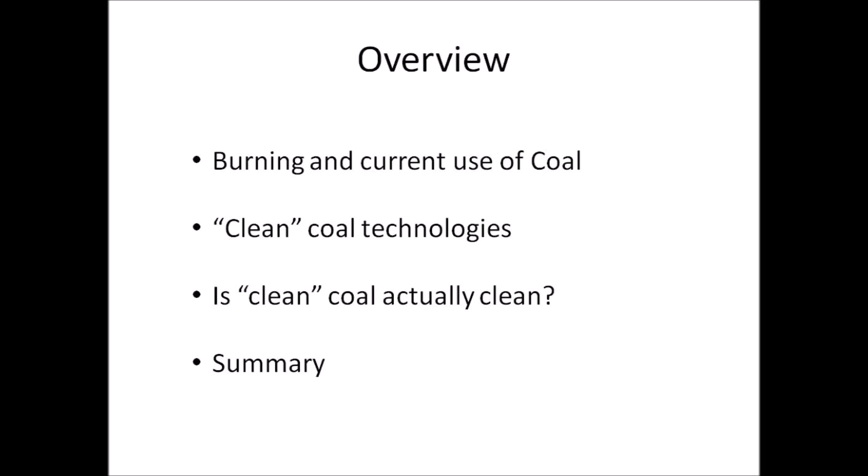Coal is classified into four main types and ranked accordingly: lignite, subbituminous, bituminous, and anthracite. The ranking depends on the types and amount of carbon the coal contains and on the amount of heat energy it can produce. Lignite or brown coal contains 25% to 35% carbon, around 70% when dry. Subbituminous contains 35% to 45% carbon. Bituminous contains 45% to 86% carbon, and anthracite or black coal contains 86% to 98% carbon.

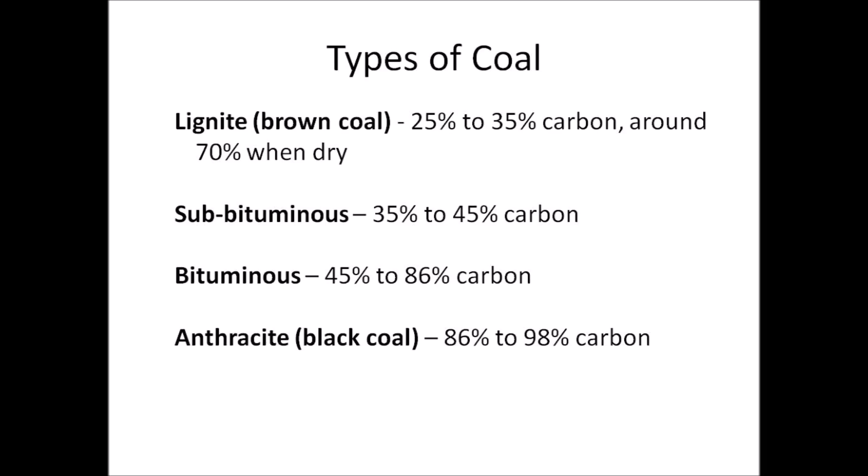In this slide, we have some specimens of coal. On the upper left corner, we have lignite, often referred to as brown coal. It is a soft, brown, combustible sedimentary rock formed from naturally compressed peat. It is considered the lowest rank of coal due to its relatively low heat content.

Next, in the upper right corner, we have subbituminous coal. It is a type of lower grade coal. Its properties are between those of lignite, the lowest grade of coal, and bituminous coal, the second highest grade. Subbituminous coal is primarily used as a fuel for steam electric power generation.

On the lower left corner, we have bituminous coal. It is a relatively soft coal containing a tar-like substance called bitumen or asphalt. It is of higher quality than lignite and subbituminous coal, but of poorer quality than anthracite.

And lastly, anthracite, also known as hard coal or black coal. It is a hard, compact variety of coal that has a submetallic luster. It has the highest carbon content, the fewest impurities, and the highest energy density of all types of coal, and is the highest ranking of all coals.

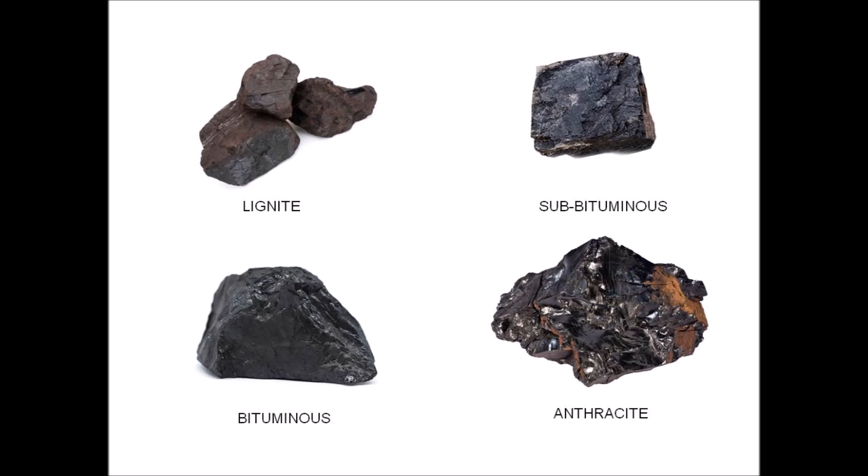Coal and electricity: coal-fired plants produce electricity by burning coal in a boiler to produce steam. The steam, produced under tremendous pressure, flows into a turbine, which spins a generator to create electricity. The steam is then cooled, condensed back into water, and returned to the boiler to start the process over.

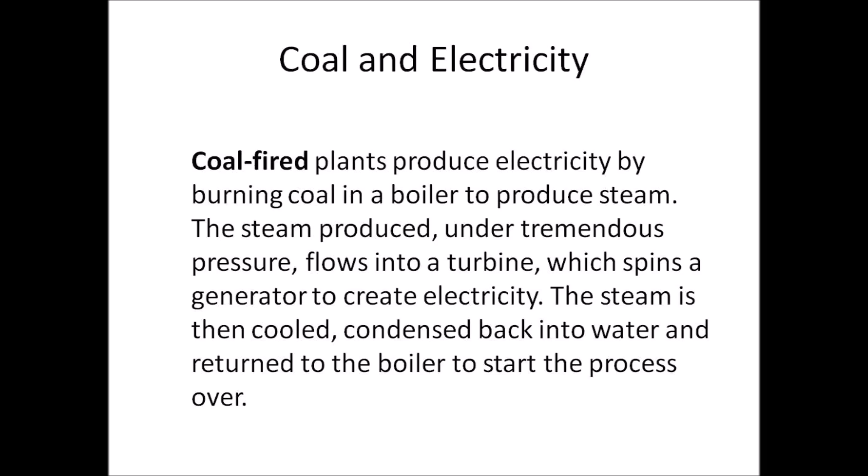In 2002, fossil fuels released 23 billion tons of carbon dioxide into the atmosphere. Of that, 41% was from coal. Burning 1 ton of black coal yields 4 tons of carbon dioxide, with other coals averaging 2 tons. Anthracite releases 67% more carbon dioxide than methane, and brown coal releases 130% more carbon dioxide emissions than methane. Coal also contains trace amounts of sulfur and nitrogen that, when burned, can cause environmental issues.

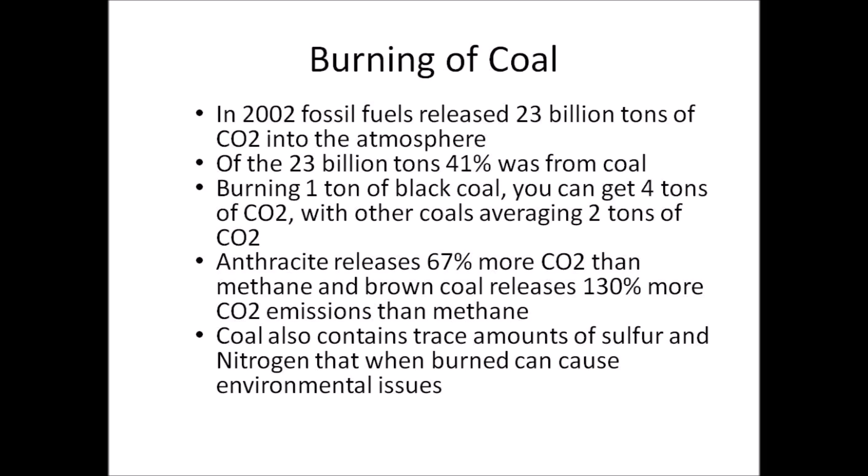Why is coal still used? It is the cheapest for power stations relative to the amount of heat it generates when burned, and it's also by far cheaper than nuclear, natural gas, and oil. Although alternatives like hydro are usually slightly cheaper, problems with hydro include no new facilities due to public outcry when river valleys are dammed, and peak demand problems, such as rivers running dry in the dead of summer when peak air conditioning is needed.

Why is coal still used? It is said to be the cheapest for power stations relative to the amount of heat it generates when burnt. Here are the cheapest options. The graph shows that from 1999 to 2007, coal still remains the cheapest amongst all the options.

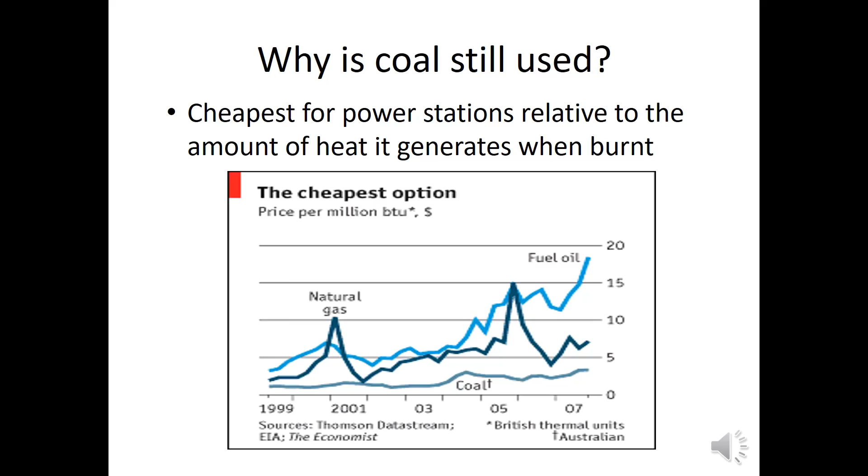So how does a coal power plant work? Coal-fired plants produce electricity by burning coal in a boiler to produce steam. The steam, produced under tremendous pressure, flows into a turbine, which spins a generator to create electricity. The steam is then cooled, condensed back into water, and returned to the boiler to start the process over.

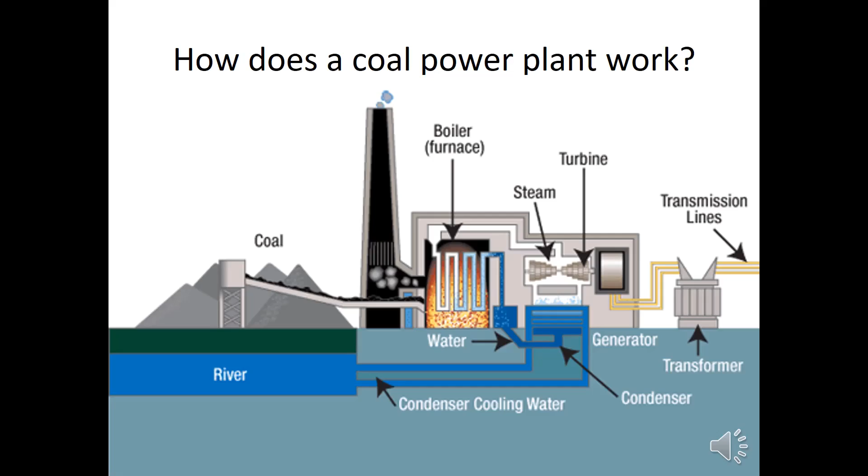So what is clean coal? It is actually a vague term that does not describe any one process. It can include the removal of nitrogen and sulfur that creates acid rain, or the storage of carbon dioxide. The term clean coal is abused.

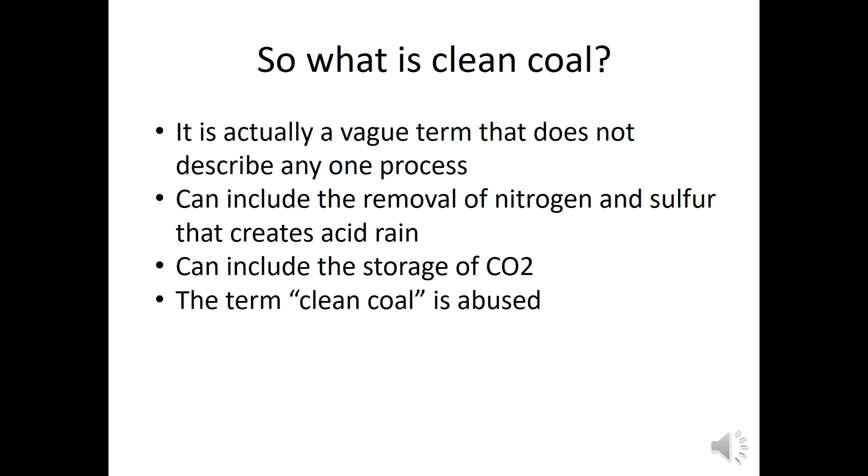Clean coal technologies include coal washing, wet scrubbers, low nitrogen oxide burners, electrostatic precipitators, gasification, carbon capture storage or CCS, fuel cells, and magnetohydrodynamics. These will be tackled in the next slides.

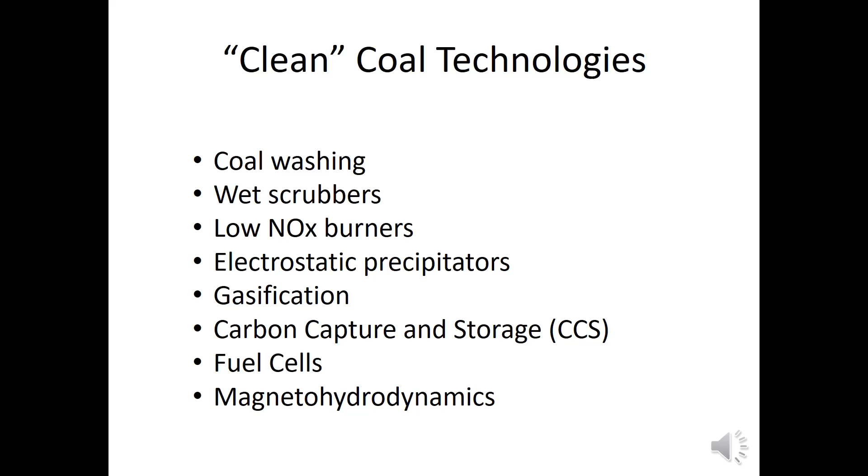Coal washing: grinding coal into pieces and passing it through gravity filtration. One technique involves putting coal into a barrel with a liquid of a specific density where the coal floats and the impurity sinks. Coal cleaning by washing has been standard practice in developed countries for some time. It reduces emission of ash and sulfur dioxide when the coal is burned.

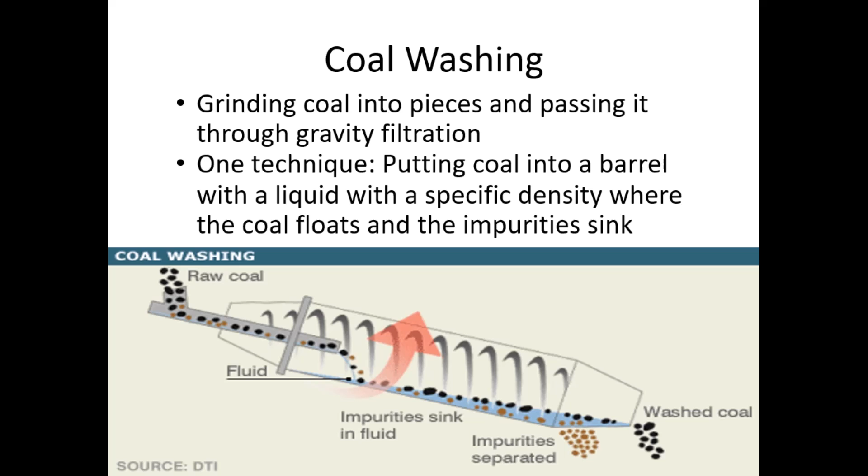Wet scrubbers can remove particulate matter by capturing them in liquid droplets. The droplets are then collected, with the liquid dissolving or absorbing the pollutant gases. A scrubber works by spraying a wet slurry of limestone into a larger chamber where the calcium in the limestone reacts with the sulfur oxide in the flue gas. Some scrubbers may use other chemicals such as lime or magnesium oxide to react with the sulfur oxide in the flue gas. Disadvantages of wet scrubbers include corrosion, the need for entrainment separation or mist removal to obtain high efficiency, and the need for treatment or reuse of spent liquid. It's also 99% effective.

The gypsum is collected and used for construction too.

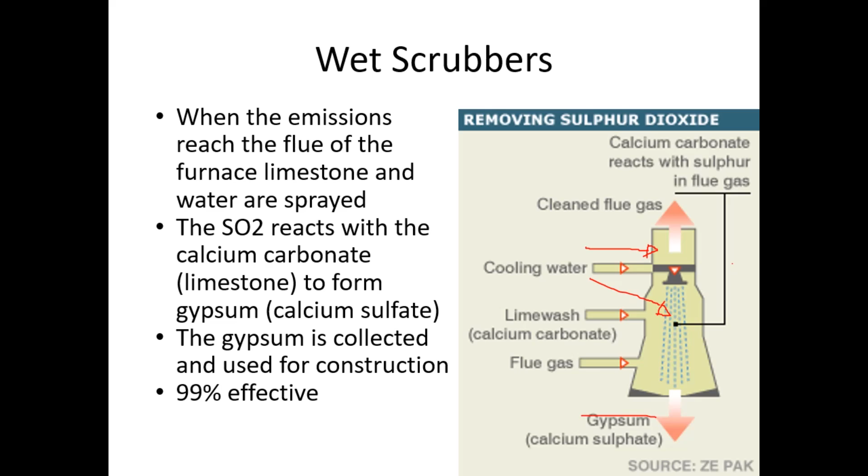Nitrogen oxide: stages in using nitrogen oxide in clean coal technology. First stage, combustion occurs in an oxygen deficient zone where nitrogen oxide is usually formed. Second stage, hydrocarbons are formed which react with the already formed nitrogen oxide. Third stage, internal air staging completes the combustion but may result in additional nitrogen oxide formation, which can be minimized by completing the combustion in an air-lean environment.

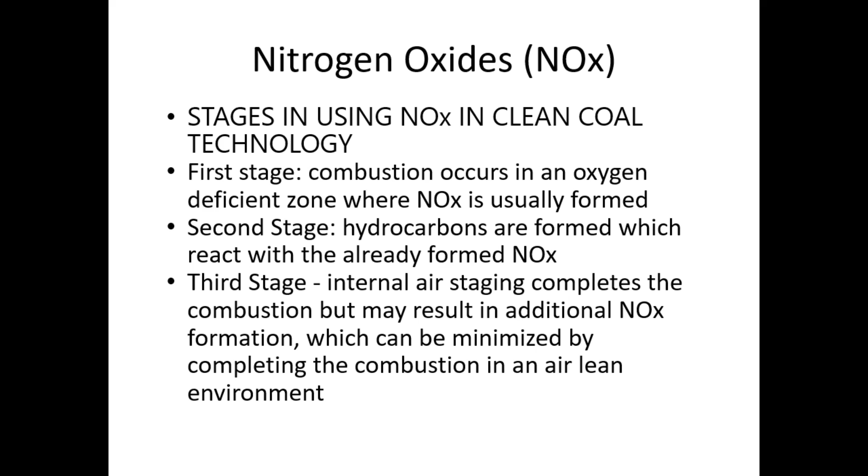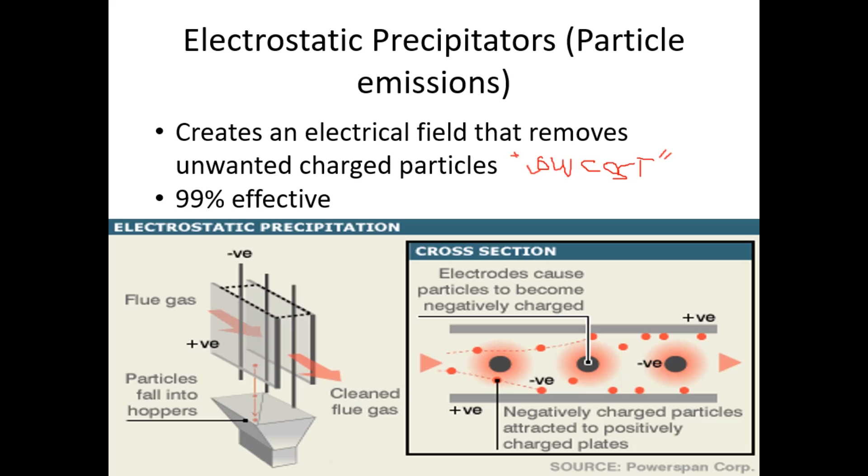Electrostatic precipitators create an electrical field that removes unwanted charged particles. At the cross-section, electrodes cause particles to become negatively charged, which are then attracted to a positively charged plate. The flue gas passes through the cross-section, the particles fall into the hopper, and the flue gas has been cleaned.

Gasification is a type of thermochemical conversion process favored by some because it is very flexible and has high levels of efficiency. It uses heat to convert biomass or fossil fuel-based materials into intermediates like hydrogen and carbon monoxide rich gas, called synthetic gas, or syngas.

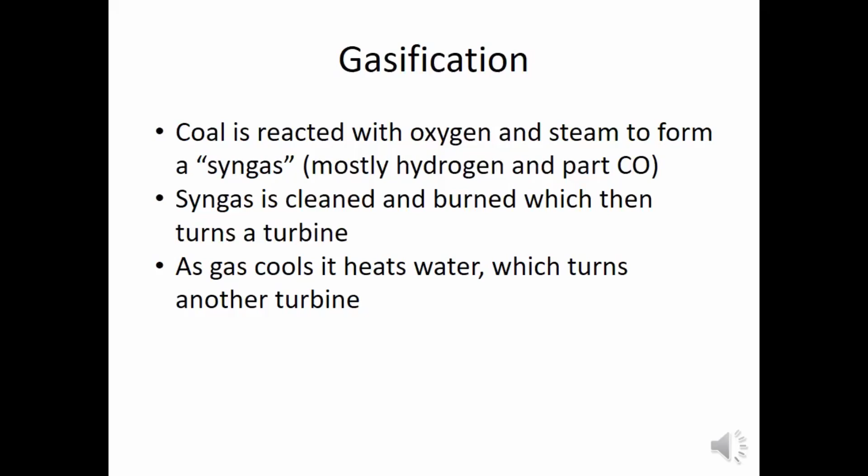Syngas is cleaned and burned, which then turns a turbine. As the gas is being cooled, it also heats water, which turns another turbine. Gasification is known for its advantage over combustion in terms of emission control.

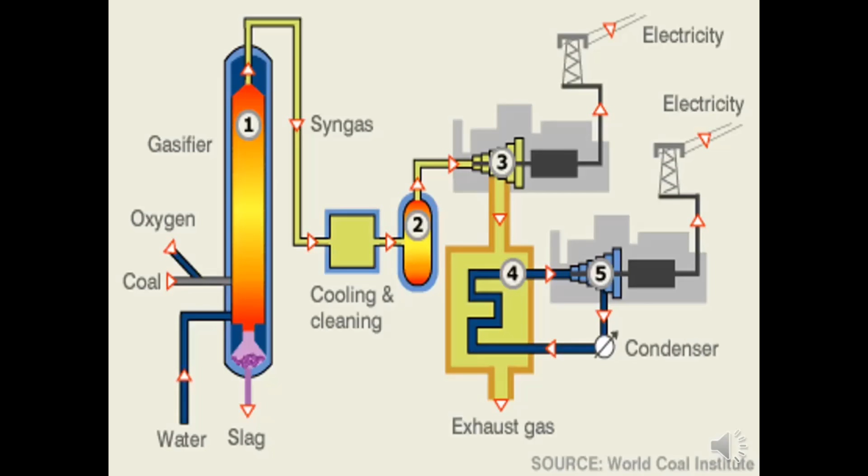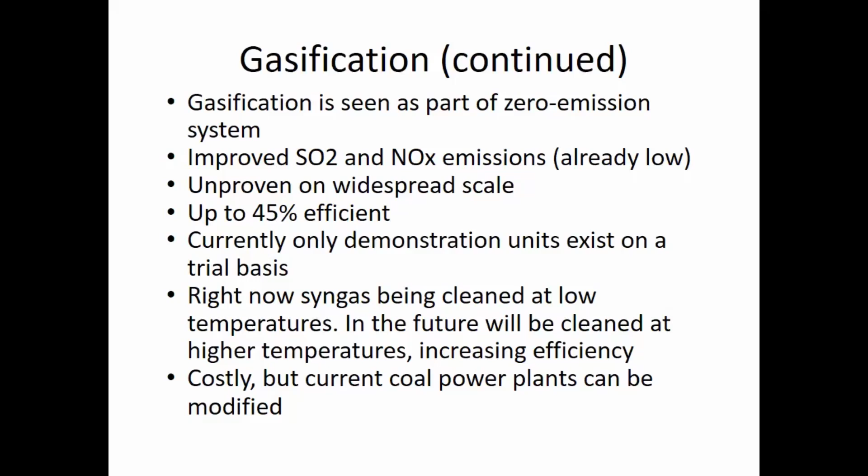Right now, it is expected that syngas is cleaned at low temperatures. In the future, it will be cleaned at higher temperatures, increasing efficiency. The gasification power plant is also very costly, but current coal power plants can be modified to increase efficiency, reduce production cost, and improve durability.

Carbon capture and storage is the capturing and storing of carbon dioxide underground. This process is what we term geosequestration. It can capture up to 90% of the carbon dioxide released by the process of burning fossil fuel.

The figure shows the options for carbon capture and storage. First, carbon dioxide is pumped into used coal fields and displaces methane, which can be used as a fuel. Second, carbon dioxide can be pumped into and stored safely in saline aquifers. Third, carbon dioxide is pumped into oil fields, which helps maintain pressure, making extraction easier.

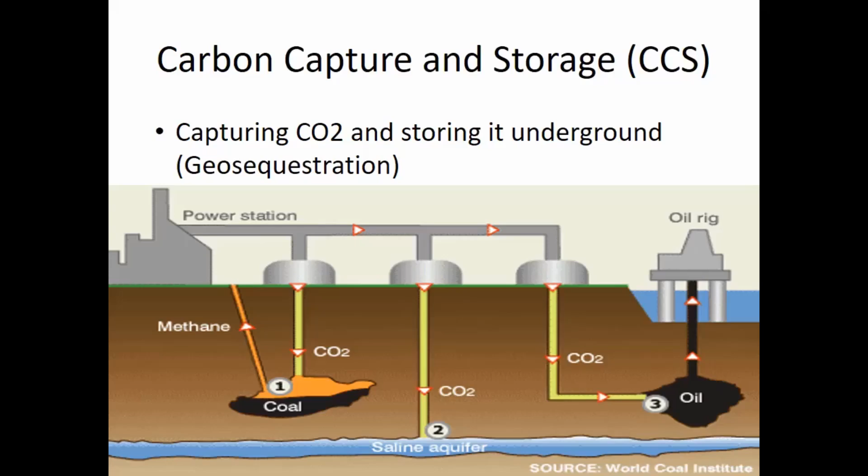The carbon dioxide is stored in carefully selected geological rock formations typically located several kilometers below the Earth's surface, so it is transported by pipelines or by ships. There are only so many places that are good for mass storage, and this transportation could also become costly.

At every point in the CCS chain, from production to storage, industry has at its disposal a number of process technologies that are well understood and have excellent health and safety records. The commercial deployment of CCS will involve widespread adoption of these techniques, combined with robust monitoring and government regulation.

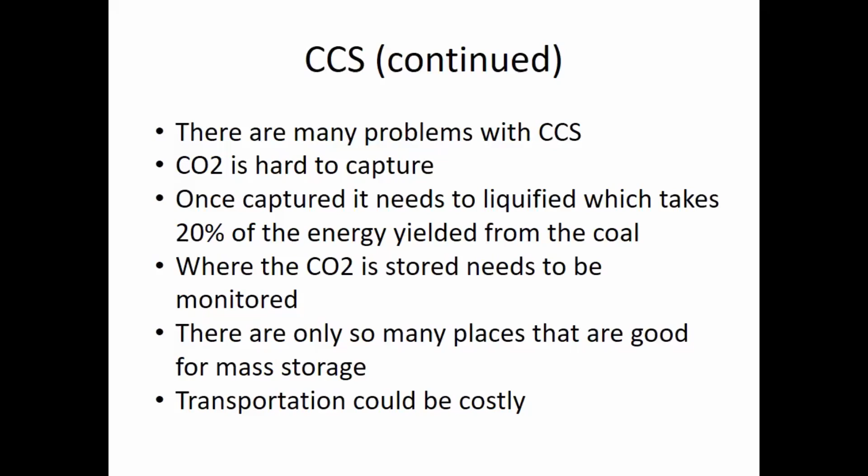Fuel cells allow hydrogen from coal to react with oxygen to produce electricity electrochemically. Specifically, hydrogen is produced by first reacting coal with oxygen and steam under high pressures and temperatures to form synthesis gas, a mixture consisting primarily of carbon monoxide and hydrogen, and it is costly.

This picture shows how a fuel cell works. First, hydrogen reacts with a catalyst when it reaches the anode. Second, this makes positively charged particles that go through the electrolyte, and electrons that travel along a circuit make an electrical current. Lastly, when the particles and electron reach the cathode, they react with oxygen to form water and usable heat.

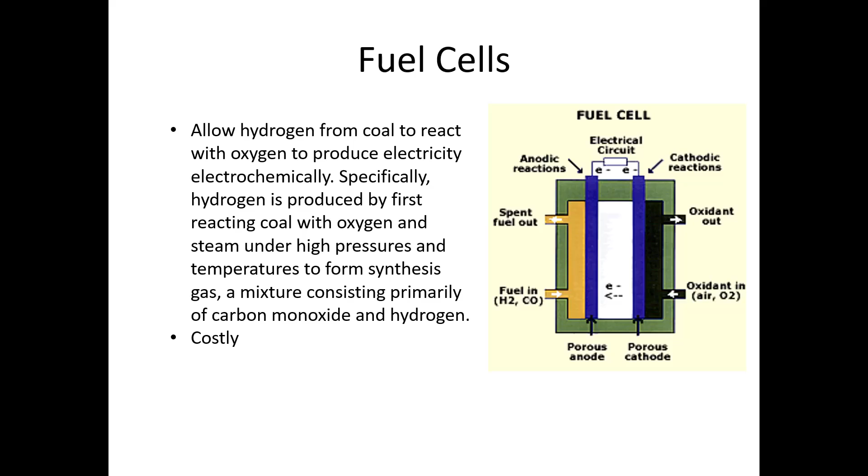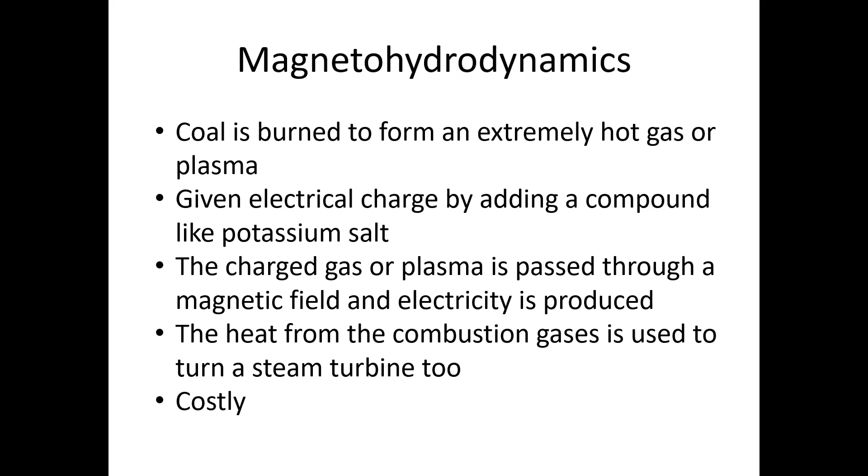Magnetohydrodynamics: coal is burned to form an extremely hot gas or plasma, given an electrical charge by adding a compound like potassium salt. The charged gas or plasma is passed through a magnetic field and electricity is produced. The heat from the combustion gases is used to turn a steam turbine, and it is costly.

So is clean coal really clean? Unfortunately, there's no way to make coal clean. Processes like gasification can make coal burning more efficient, but it still burns plenty of carbon dioxide. Carbon dioxide can be stored underground using CCS, but that could lead to more problems in the future.

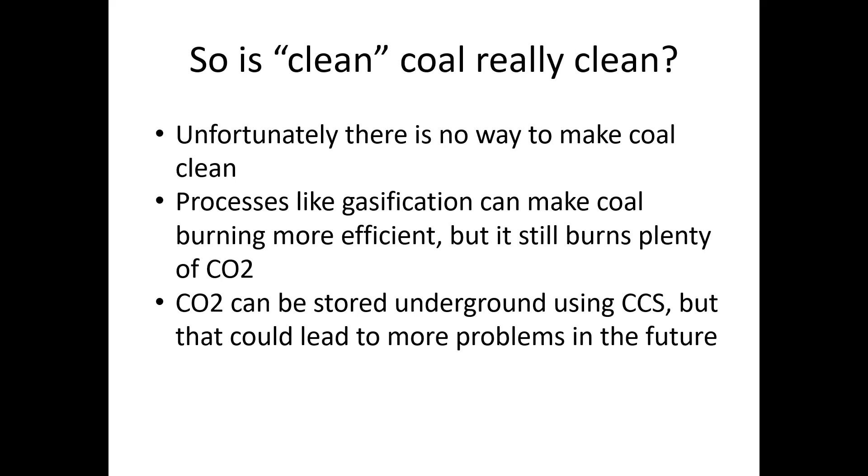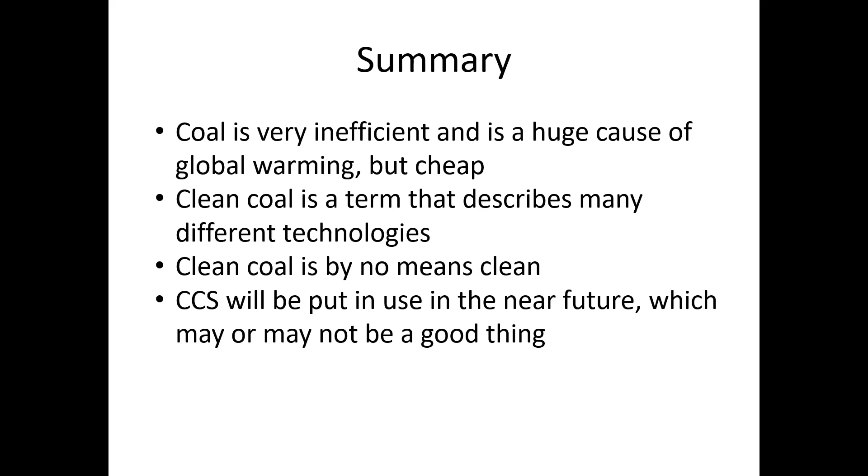Summary: Coal is very inefficient and is a huge cause of global warming, but it is cheap. Clean coal is a term that describes many different technologies, and clean coal is by no means clean. Lastly, CCS will be put into use in the near future, which may or may not be a good thing. That's all. Thank you.